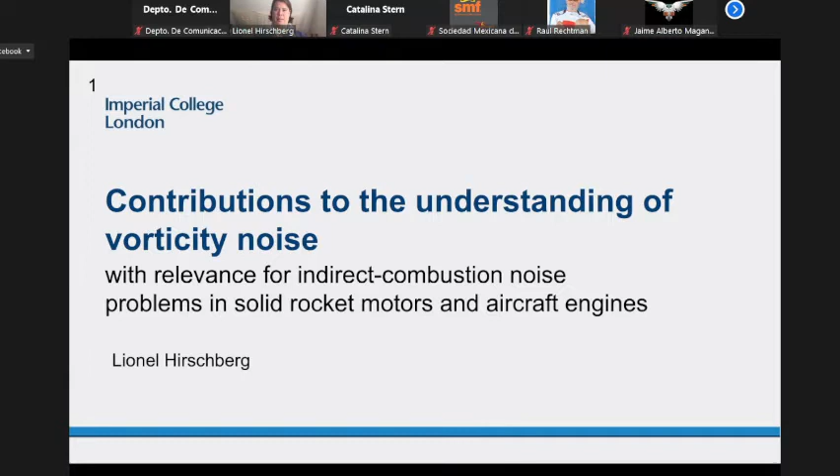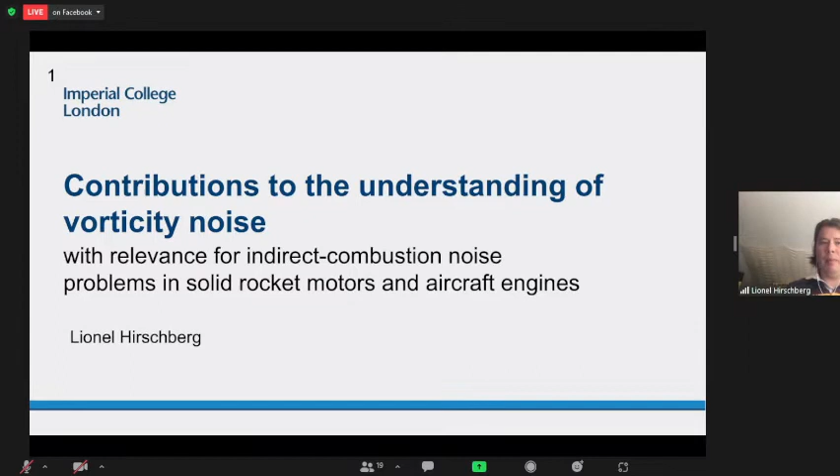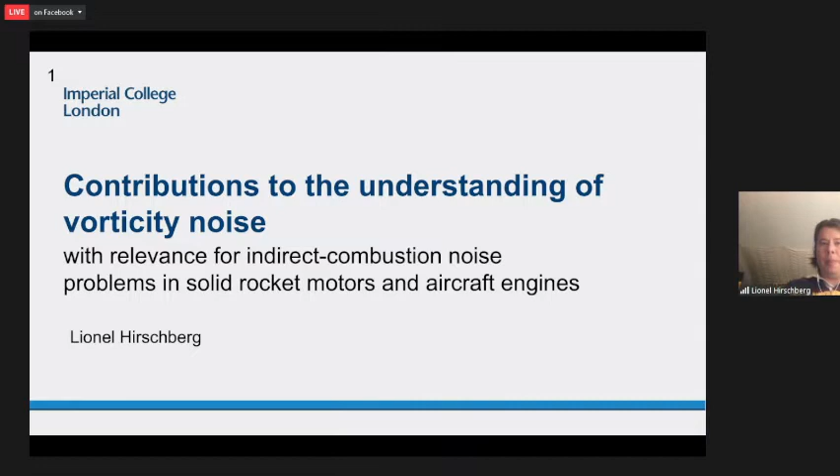Thank you very much, Enrique. I changed the title of my presentation a little bit, but I'm basically going to talk to you about my contributions and my co-authors' contributions to the understanding of what we call vorticity noise in jargon. This is relevant for indirect combustion noise problems in solid rocket motors and aircraft engines. Now, what do we mean by vorticity noise? I think it's most expedient to just start by way of example to explain what we mean by that.

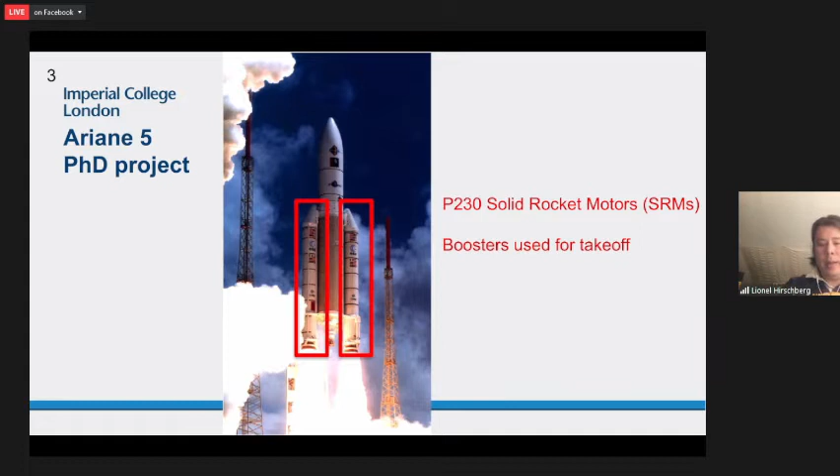Seem to have a problem. Okay. Sorry, thank you for bearing with me.

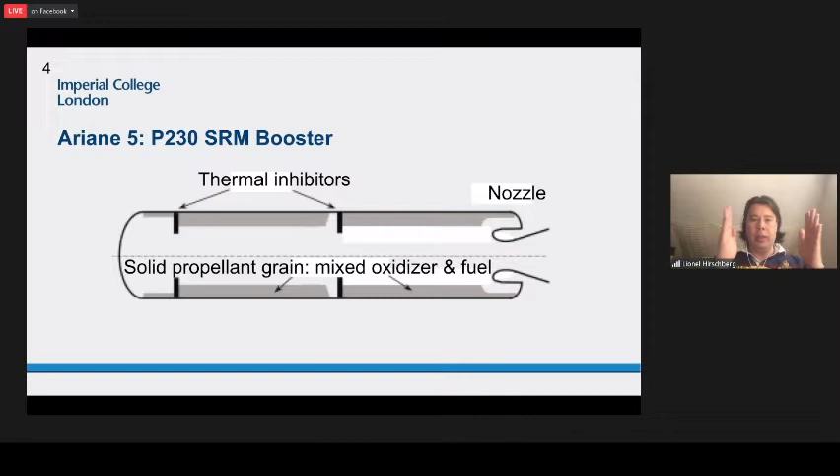So a solid rocket motor is actually a pretty simple device. I show a sketch on this slide. It's basically a cylindrical tube closed at the head end with a nozzle downstream. So that's the combustion chamber exit. And on the side walls, there are propellant grains, a mix of oxidizer and fuel, that are separated by inhibitors. And once you ignite this propellant, the combustion causes a mass flow that exits through the nozzle.

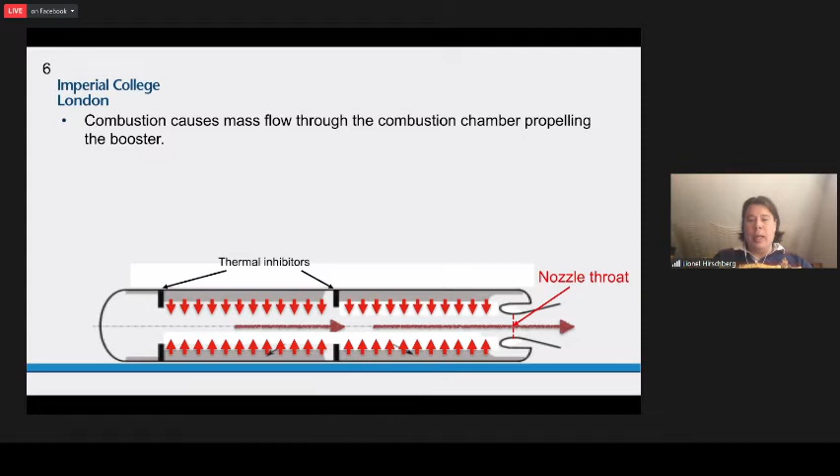And this nozzle is basically convergent-divergent. At the point where the cross-sectional surface area is the smallest, we call this area the nozzle throat. The conditions inside this combustion chamber are such that the static pressure is about 5 megapascals. That means that at the nozzle throat, the Mach number based on the actual velocity, u_x throat, divided by the local speed of sound equals 1. We say that the flow is transonic, and we call this a choked nozzle flow.

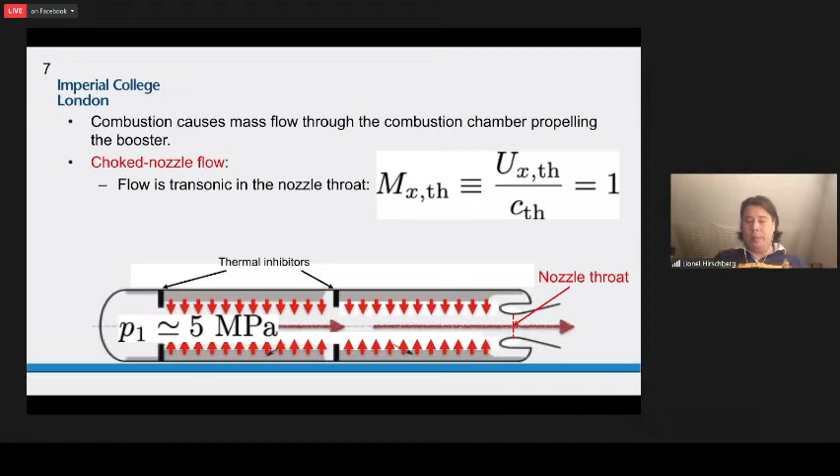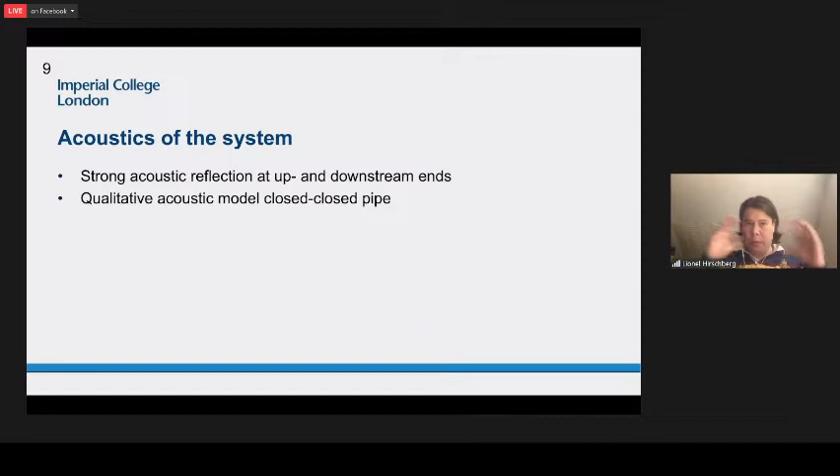There are some characteristics of the acoustics of this system that I want to explain to you. Basically, there are strong acoustic reflections at the up and downstream ends of this cylindrical tube. So qualitatively, we can model this as a closed-closed pipe system for the sake of acoustics. And the lowest longitudinal acoustic mode, which we call the first longitudinal acoustic mode, is half a wavelength.

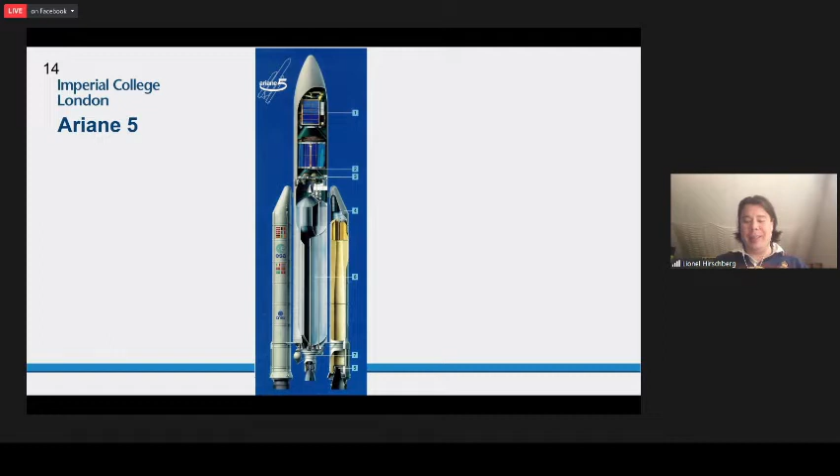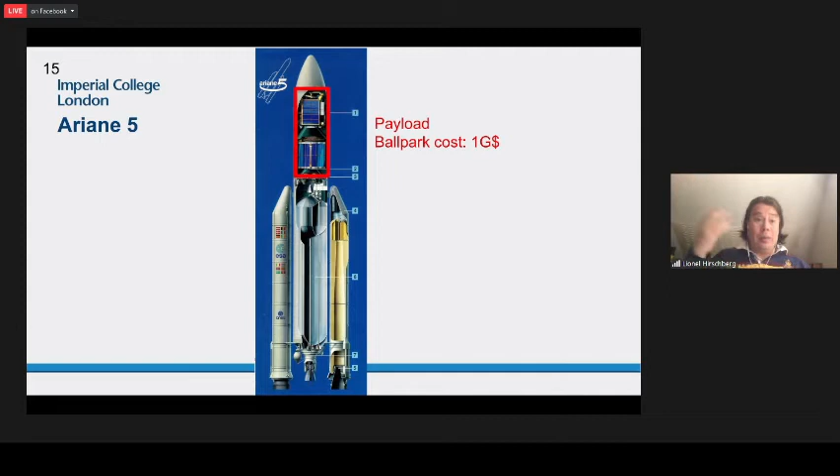Why is this a problem? Well, that's because the whole design purpose of Ariane 5 and launch vehicles like it is to bring payload, i.e. satellites, into geostationary orbit around the Earth. These are very, very expensive devices. They cost about $1 billion US to make. And they're fragile. So you want them to arrive into orbit around the Earth, and you want them to work. The problem is that these self-sustained pressure pulsations, in the worst case scenario, can cause vibrations that couple with the structure of the main stage and pose a threat to the payload.

So it becomes imperative to understand what fundamentally drives these self-sustained pressure pulsations. And the sound source especially is important, and that was the focus of my PhD thesis. So let's turn again to the occurrence of these pressure pulsations in these solid rocket motors.

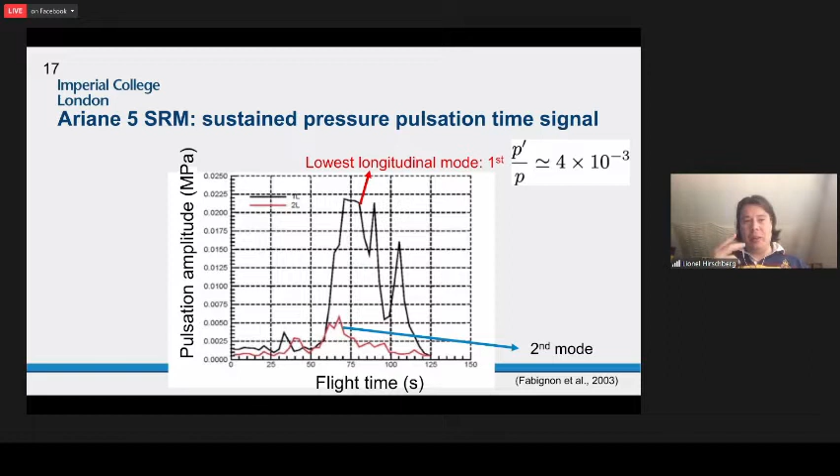So we have the pulsation amplitude in megapascals as a function of flight time in seconds, and we observe that they only start to occur halfway through flight. And you can legitimately ask yourself, why would this be? And as it happens, there are two components to this answer. The first is that this propellant grain that I talked about earlier is separated by thermal inhibitors.

And as the propellant grain burns, these thermal inhibitors protrude out of the burning surface, and you have vortex shedding on these thermal inhibitors, and ring vortices are created that convect downstream with the base flow, have an interaction with the combustion chamber exit. So that's what I'm showing here.

This is a numerical simulation performed by Jérôme Anthoine, who did a PhD thesis in the 1990s on this subject. And basically, my work builds on what he has done, or our work, me and my co-authors. So you have vortex shedding at these thermal inhibitors, and these ring vortices convect downstream and have an interaction with the combustion chamber, that is the choke nozzle. So the combustion chamber exit.

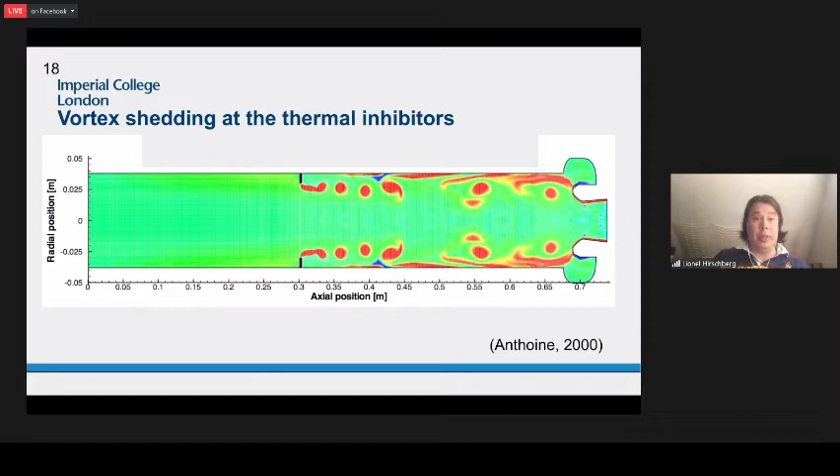Another thing that happens is that the type of nozzle that is used in these systems is what you call an integrated nozzle. That means that there is a volume around the inlet of this convergent divergent nozzle. And initially, that is the first 60 seconds approximately, this whole volume is filled with propellant. But as flight progresses, this propellant burns, and you now have an acoustically available cavity volume, a volume VC.

Well, Jérôme Anthoine experimentally established that the pressure pulsations in these systems are proportional to this cavity volume VC. And me and my co-authors, by doing systematic numerical investigations, were able to confirm this and derive scaling laws. These numerical investigations, I've done them using a state-of-the-art aeroacoustics code developed by Steven J. Hulshoff of the Delft University of Technology.

And on this slide, I show an example of such a simulation where the nozzle is a simple nozzle that is without these nozzle cavities. And you will see it already, there's an effect. So for this simulation, we established a steady base flow that goes from left to right on this slide, and is such that the combustion chamber exit, the nozzle, is choked. That is, at the nozzle throat, you have a local Mach number of 1.

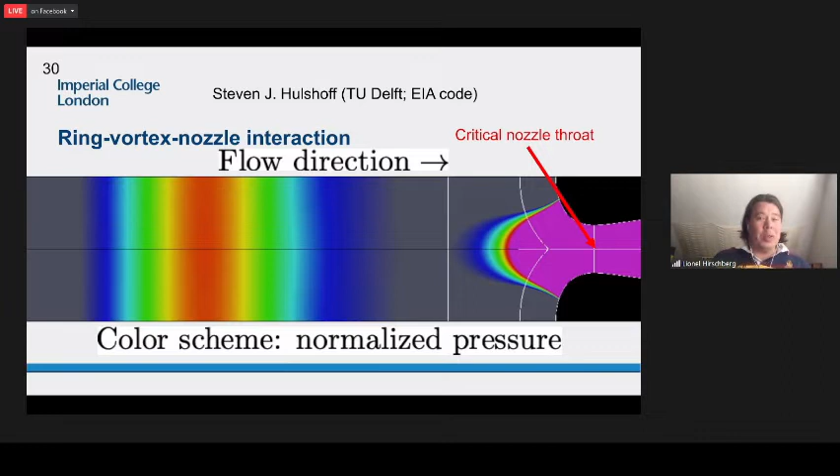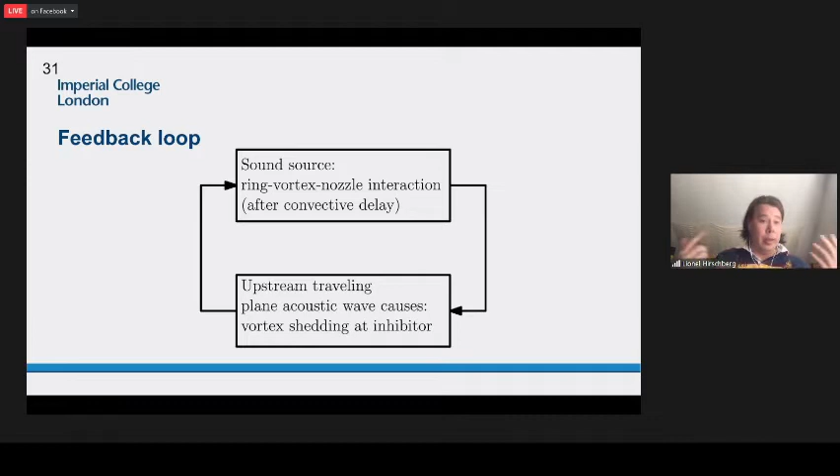Me and my co-authors referred to this as ring vortex nozzle interaction. So you have a situation where vortices are shed upstream from a choke nozzle. There's a convective delay. You have this ring vortex nozzle interaction, which produces an acoustic wave that travels back upstream, which causes vortex shedding in these systems. So you have a feedback loop, and as such, this is a self-sustained pressure pulsation.

So our contribution was to derive scaling laws for sound production due to ring vortex nozzle interaction, and we developed analytical models. So in this system, the sound source is the unsteady hydrodynamic reaction force from the nozzle inlet walls on the fluid. And the force is a time-dependent force which is being induced by the ring vortex as it approaches the nozzle and is being ingested by it.

So the sound source here, we've called it ring vortex nozzle interaction. In the literature, in the jargon, one refers to this as indirect combustion noise because the propellant is burning and this causes the mass flow and the shedding of the vortices, etc. Another term for this specific type of indirect combustion noise is called vorticity noise. That's what people refer to it in the literature.

So the important thing here is that in the system, the type of vortices that are created are ring vortices. And I have a very nice picture on this slide that shows a ring vortex. The most important takeaway from this picture is that you can clearly see that the vorticity component is normal to the main flow for ring vortices.

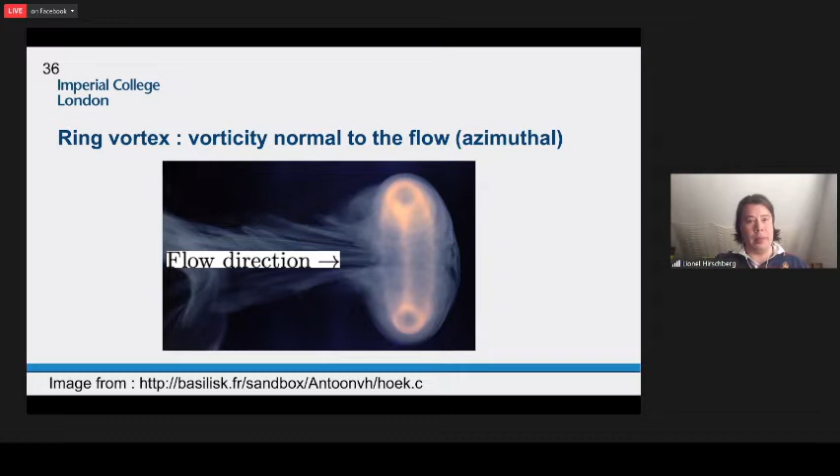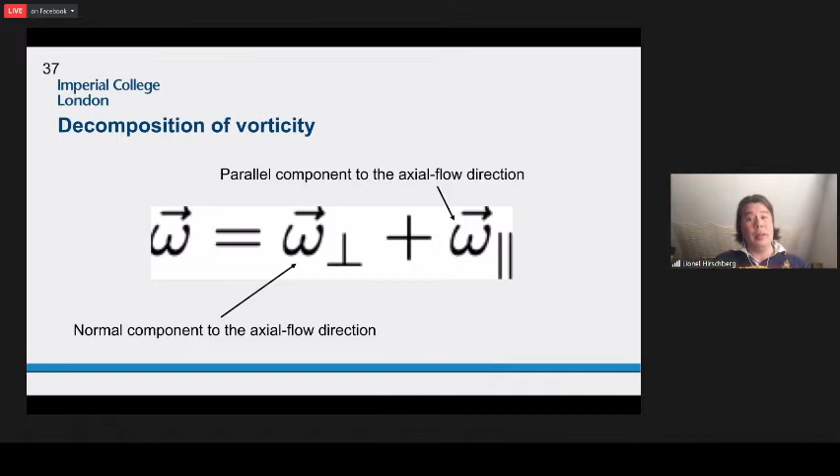But vorticity is a vector. And as such, you can always decompose a vector. And I propose that we decompose it in a component that is normal to the axial or main flow direction, and one that is parallel to the main flow direction. So contributions to vorticity noise due to the normal component, that would be ring vortex nozzle interaction, for example, and that was the subject of my PhD.

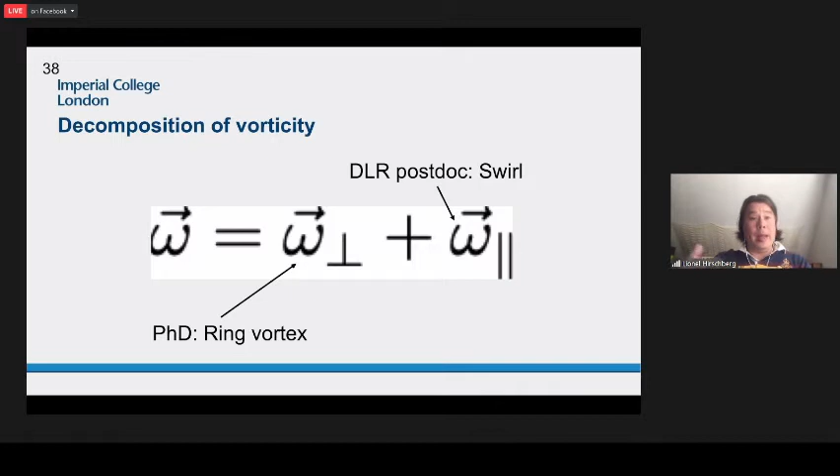Everything that is parallel to the main flow or parallel to the axial flow direction, that's what we would call swirl nozzle interaction or axial vortex nozzle interaction. And that was the subject of my investigations during my postdoc at the DLR in Berlin, where I worked in Friedrich Bake's group. And they are interested in noise, indirect combustion noise produced in civil aviation aircraft engines.

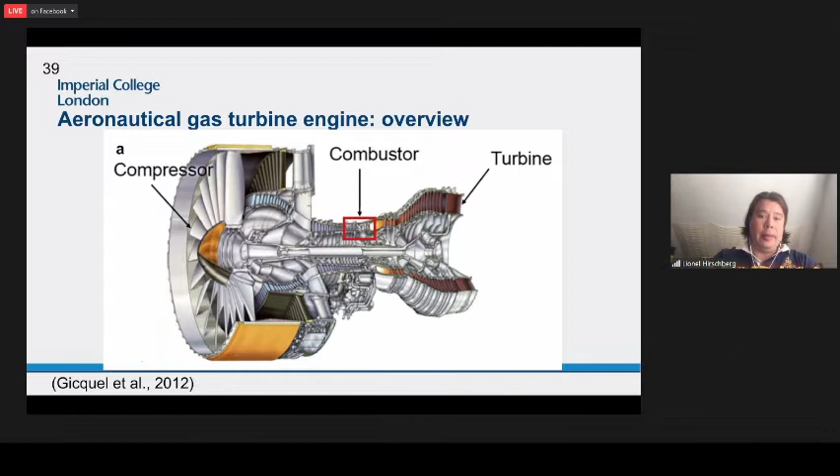And on this slide, I show a sketch of such an engine. So you have a compressor, a combustor, and a turbine. And it's in the combustor that things happen that are of interest for the DLR, at least that team. So that's highlighted by the red rectangle on this slide.

And what's important to note is that upstream from basically the combustor inlet, there's a device called a swirler. And this swirler creates an axially oriented vortex, or what they call a swirl, to stabilize combustion. So the reacting zone basically has an axially oriented vortex, or a vortex that is in the direction of the main flow. So you have a vorticity component that is parallel to the main flow direction.

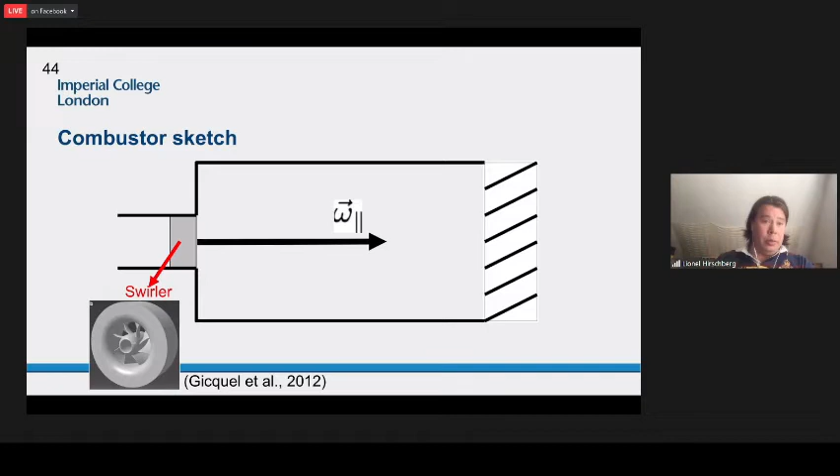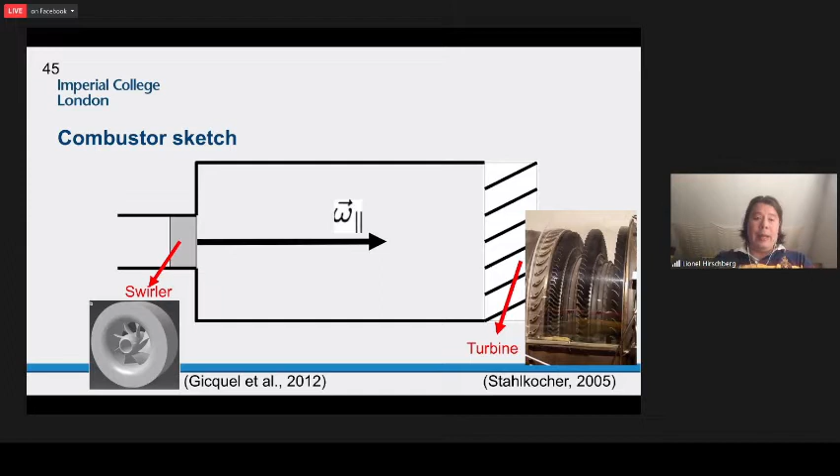But when you take a step back and you look at such a combustor, and I show a very simple sketch of the combustor here, you have an upstream swirler, which causes a swirl, that is an axial vortex, to be created. So you have a vorticity component in the direction of the main flow, and this will obviously have an interaction with the combustion chamber exit, and that's a turbine stage. Well, a turbine stage is basically a succession of rows of choked nozzles.

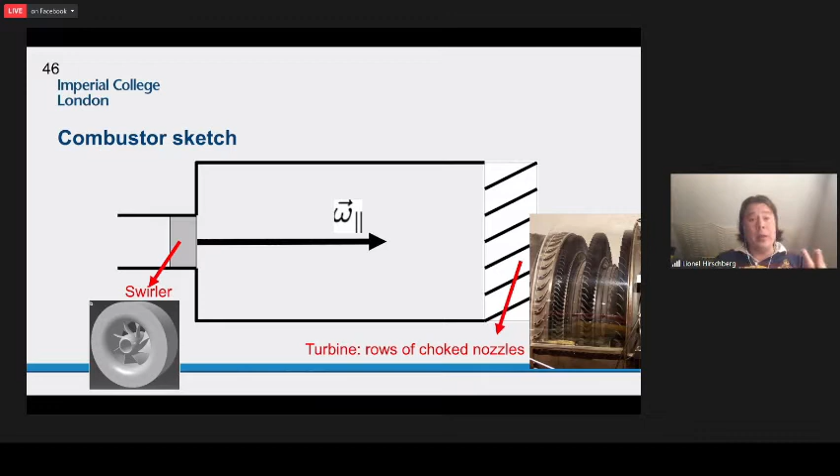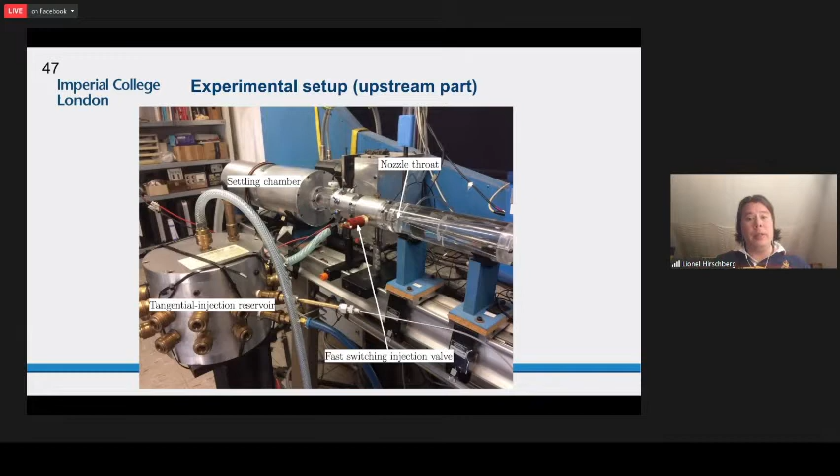It is extremely expensive and complicated to do either numerical simulations or experiments with rotating machines. So at the DLR, they chose to simplify. And they have a setup there that I helped to improve, where you basically investigate the interaction of swirl or axial vorticity with a single choked nozzle. And on this slide, I show the upstream part of this experimental setup. But it's easier to understand what we did if you look at the sketch that I show on this slide.

So you have a mass flow rate that we impose upstream. So that's on the left-hand side highlighted by the red rectangle, M1 dot, which we impose, and it is 43 kilograms per hour, and it imposes basically a steady base flow that goes from left to right and goes through a convergent divergent nozzle, and is such that the nozzle is choked. That is, at the nozzle throat, we have a Mach number equal to 1, and we chose 43 kilograms per hour because we have a choked nozzle flow, but the downstream shock is weak. So you have a normal shock that exists downstream from this nozzle throat. So you have this steady base flow.

A little note about the notation on this slide. Basically, the subscript 1 indicates parameters upstream from the nozzle, and the subscript 2 indicates parameters or variables that are downstream from the choked nozzle.

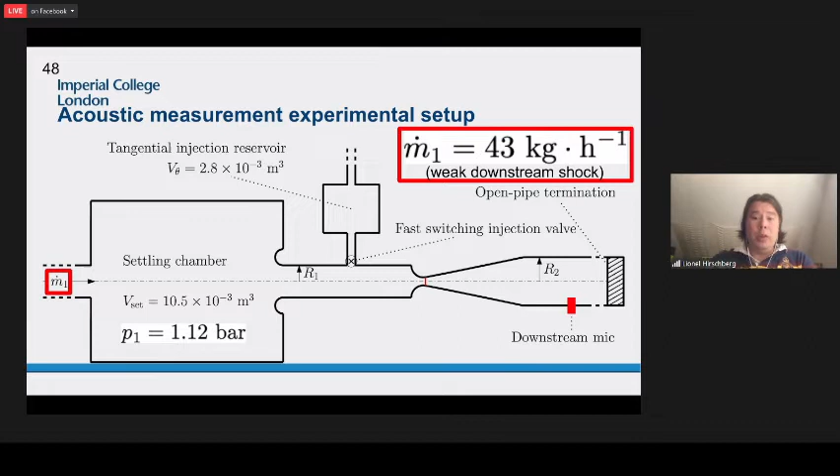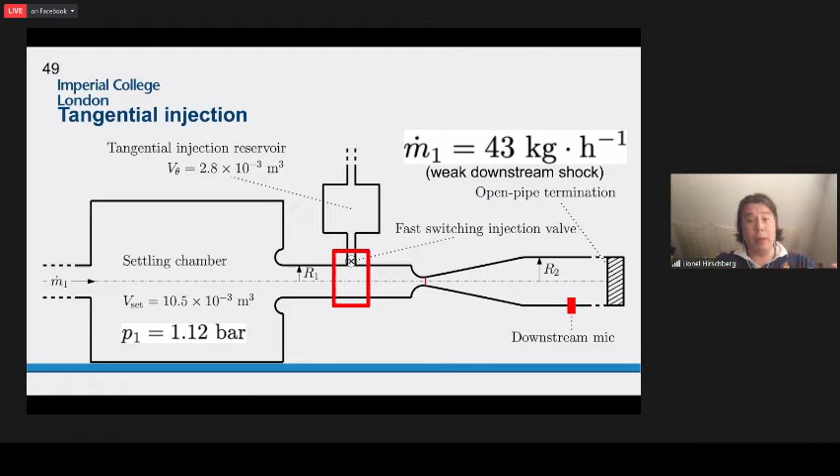So basically, we have a situation where we've imposed a steady base flow. You have a choked nozzle, and we are now going to do tangential injections of air from a pressurized reservoir in the region that I highlight with the red rectangle on this slide. We do this using an unsteady tangential injection module, which I show on this slide.

The most important part of this injection module is a fast switching valve. It's basically a valve that opens and closes very quickly, in 2 milliseconds. You can fix the time that the valve is open, and we've done this. So for example, in the results that I'm about to show you, we fixed it at 24 milliseconds.

And what we did in the experiment is basically open this for 24 milliseconds, then wait 3 seconds, and then redo an injection event, and basically repeat this 100 times, and then average the signal to get rid of some noise. So

The distance between the microphone that we use to record this acoustic response and basically the end of the experimental setup is 24 meters, or it was. And we've chosen this very long pipe section because it allows us to measure the acoustic signal without upstream traveling acoustic reflections. So we have basically an anechoic signal for about 140 milliseconds.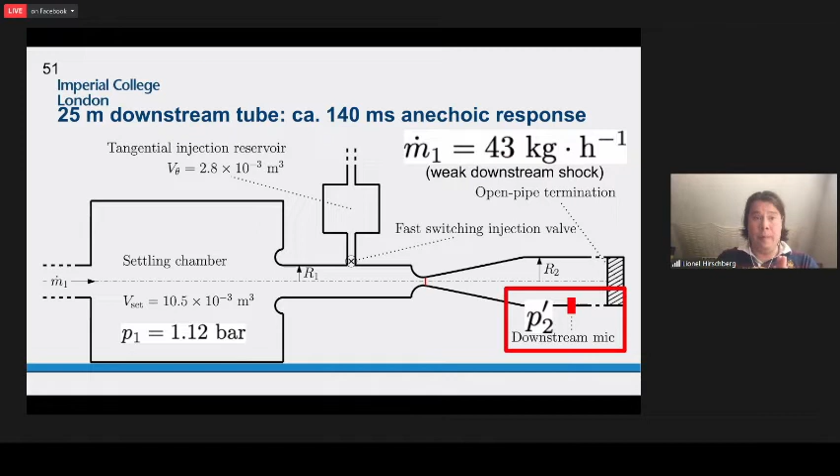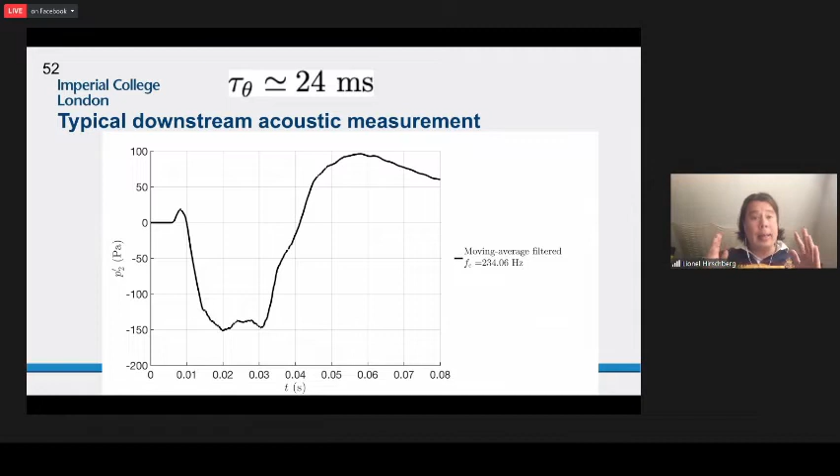What I show on this slide is an example of an acoustic response for an opening time of 24 milliseconds. So on the vertical axis, you have P2 prime in pascals, the downstream acoustic signal, as a function of measurement time in seconds on the horizontal axis. And basically, as it turns out, after our analysis, we find that this response due to the interaction of swirl with this choke nozzle occurs in 3 steps.

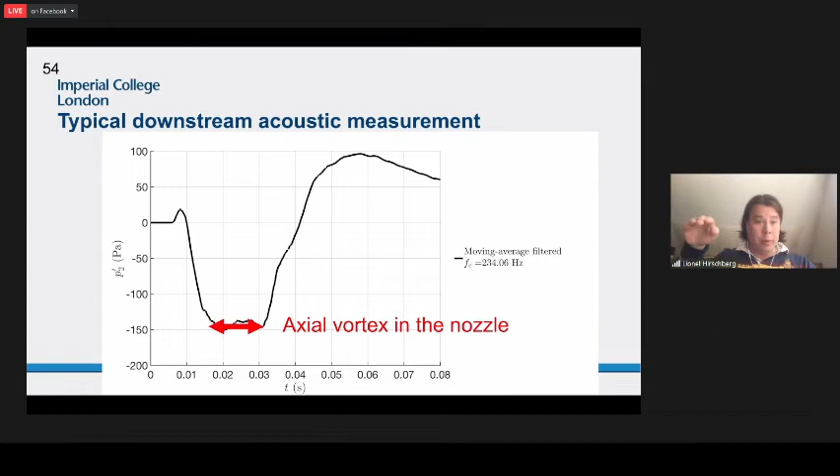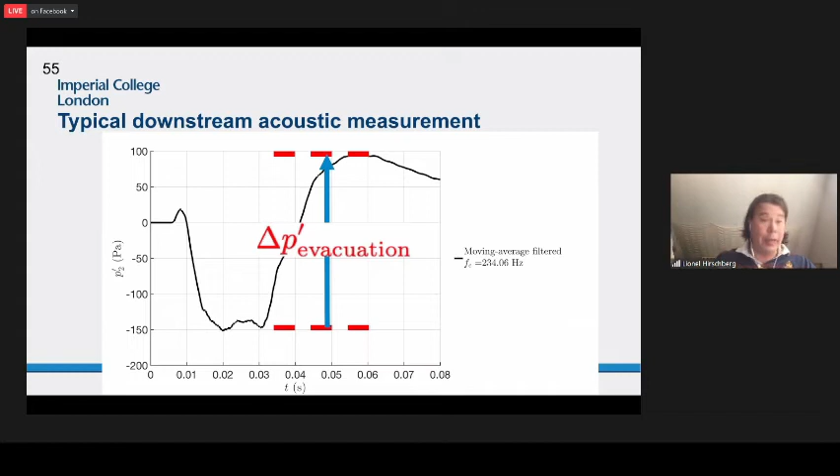The first step is an ingestion phase. This causes an abrupt decrease of pressure in the downstream pipe section. Then we have the presence of swirl in the nozzle, which causes a plateau. And then you have a rapid increase of pressure in the downstream pipe section, and that's due to the evacuation of said swirl. So you might ask yourself, why would that be? And that's a very legitimate question. I'm going to attempt to qualitatively answer this question for the ingestion phase.

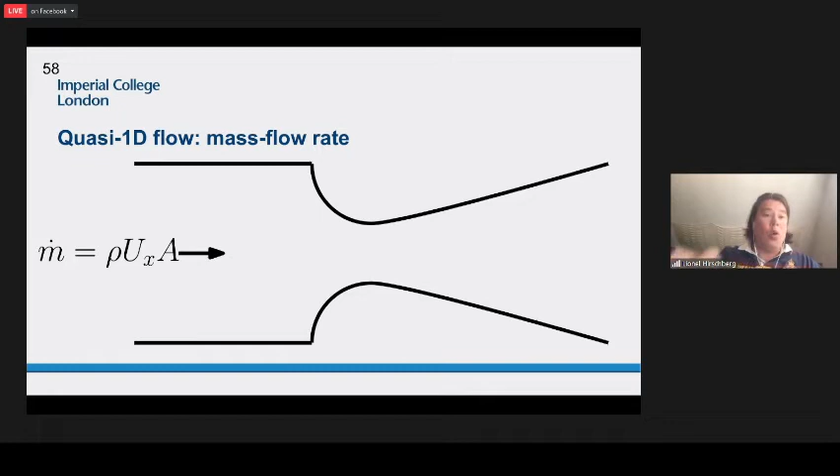So consider the convergent-divergent nozzle. And we impose upstream a mass flow rate, m dot, which basically causes a quasi-1D flow. And it is such that at the nozzle throat, we have a Mach number based on the axial flow velocity, ux at the throat, and the local speed of sound; the Mach number based on these equals 1.

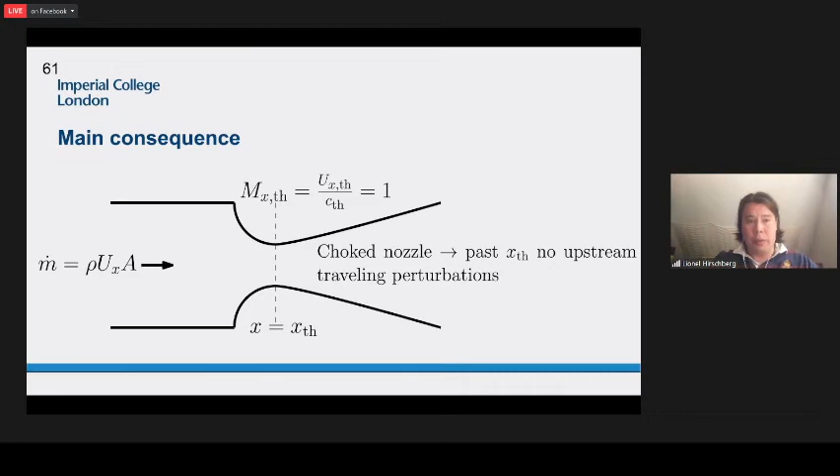The most important consequence of this choking condition is that basically any perturbations that occur downstream from the nozzle throat cannot travel back upstream. Imagine now if we introduce a swirl structure upstream from the choke nozzle, as shown on this slide. Initially, there is no swirl or axially oriented vortex at the nozzle throat. So there is no azimuthal velocity component.

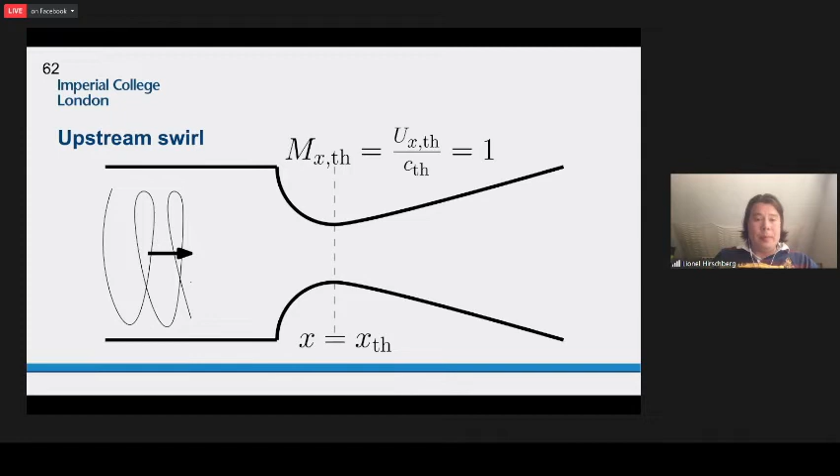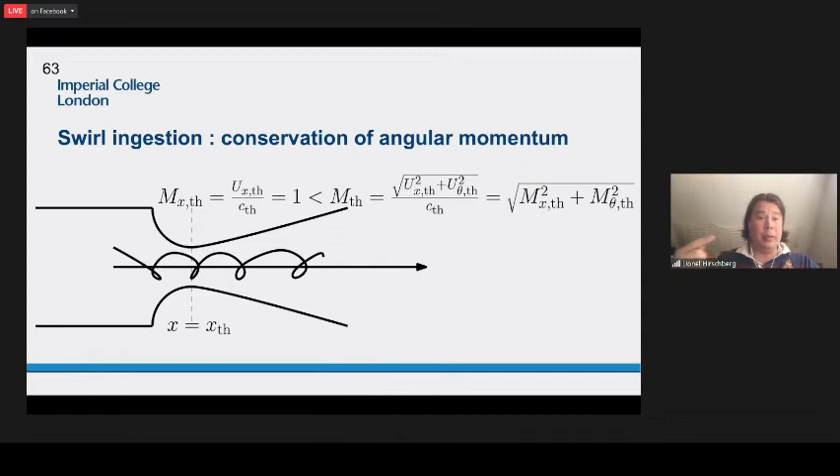But then it will get to the nozzle throat and will ingest this swirl, and this will cause a very significant stretching, and it will cause an azimuthal velocity component to exist at the nozzle throat. So the choking condition will remain the same, but the Mach number is now basically the sum of the axial Mach number at the throat squared plus the azimuthal Mach number at the throat squared, and you take the square root of that.

So basically you have a situation where swirl goes into the nozzle, which causes significant axial stretching. This causes an increase in rotational energy, and because of energy conservation, this causes a reduction of axial mass flow rate.

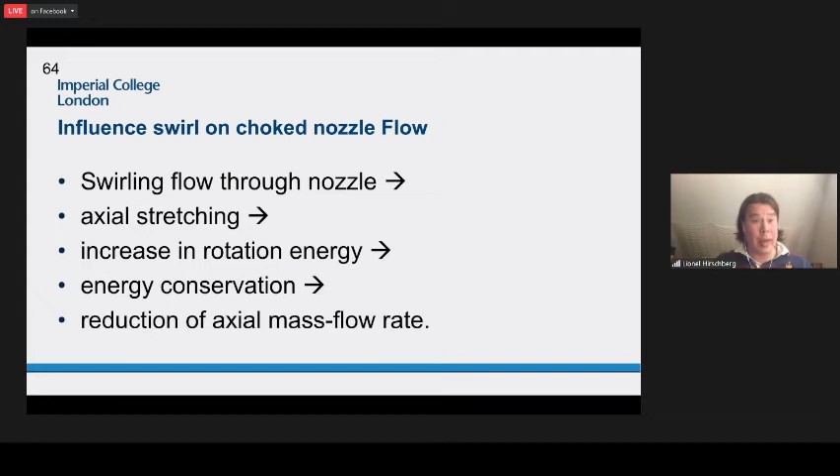So these types of problems have been studied since the 1970s, in famous papers by Carpenter, but for steady flow, right? Whereas the experiment that we did is an unsteady tangential injection event. Now, consider the formula that I show on this slide.

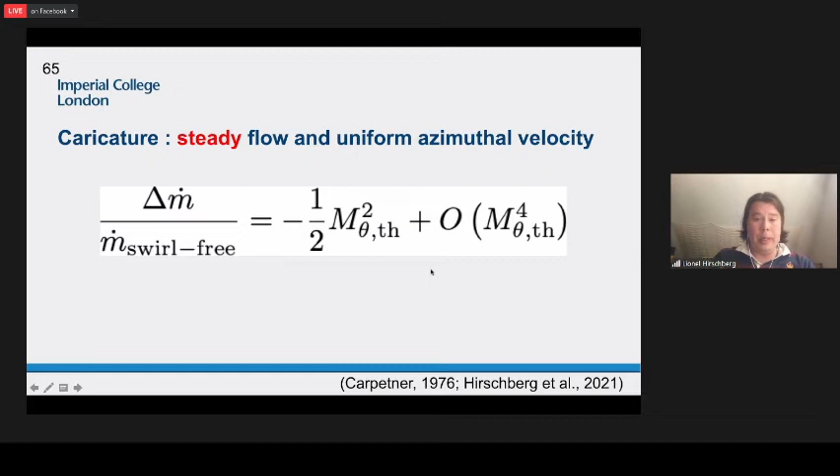It says that the change in axial mass flow rate due to the presence of swirl at the throat with respect to the swirl-free case is proportional to the azimuthal Mach number at the nozzle throat squared. So this means that when you have swirl at the throat, the axial mass flow rate reduces.

So what we can do then is use this information to propose a simple acoustic model for the downstream acoustic response, where we assume that we basically have a semi-infinite system. There's no acoustic reflections that travel back upstream. And we find that the acoustic response downstream, delta P2 prime, is approximately equal to the speed of sound in the downstream pipe section divided by the cross-sectional surface area of said pipe times the axial mass flow rate change,

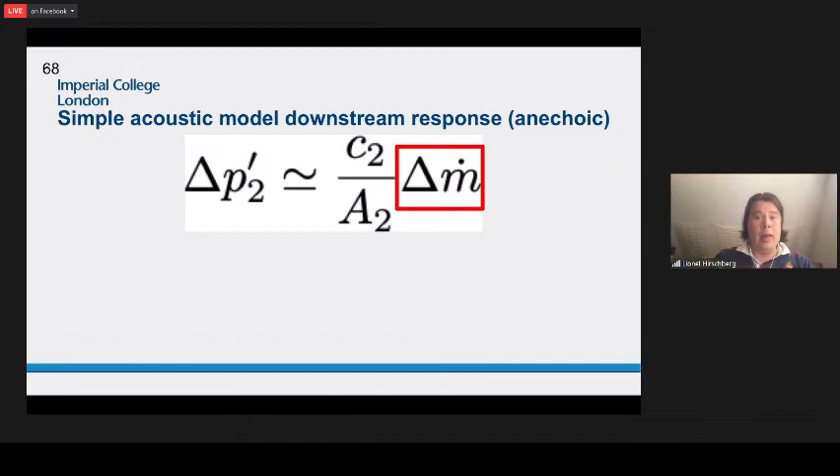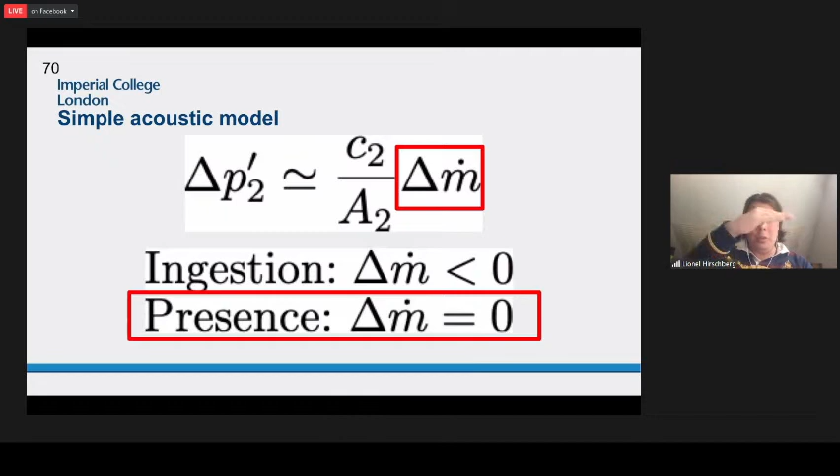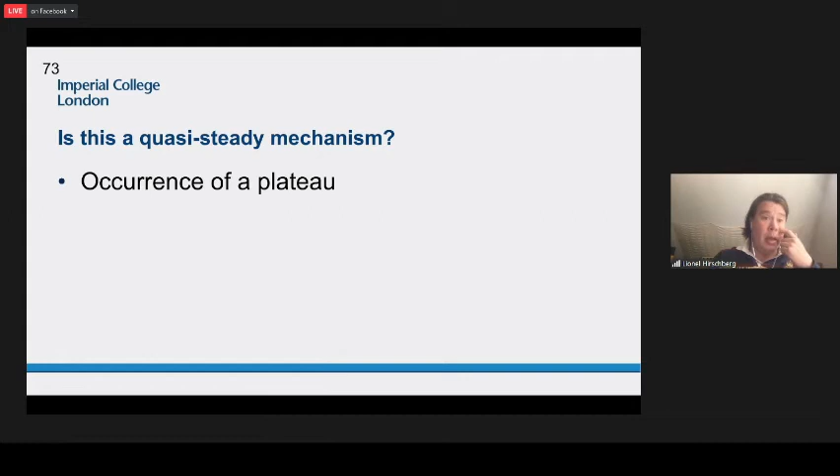delta m dot. And delta m dot is negative when the swirl structure is ingested. It is 0 when the swirl is present, so you have a plateau. And then it is positive when the swirl is being evacuated by the choke nozzle. So we asked ourselves, is this a quasi-steady mechanism? And the reason why we asked ourselves this question is that there's a plateau.

Moreover, we did experiments where we lowered and augmented the opening time of this fast switching valve, and we found that the acoustic response was not affected by the injection time. So we thought it would be worth trying coming up with a quasi-steady model.

And to do that, we replaced in the experiment the unsteady injection valve with a mass flow controller, such that we could fix the tangential mass flow rate m theta dot steady and the axial mass flow rate m1 dot. And we did it such that the total would remain those 43 kilogram per hour. So we could vary the ratio between the steady tangential mass flow rate m theta dot steady divided by m dot, or divided by 43 kilogram per hour.

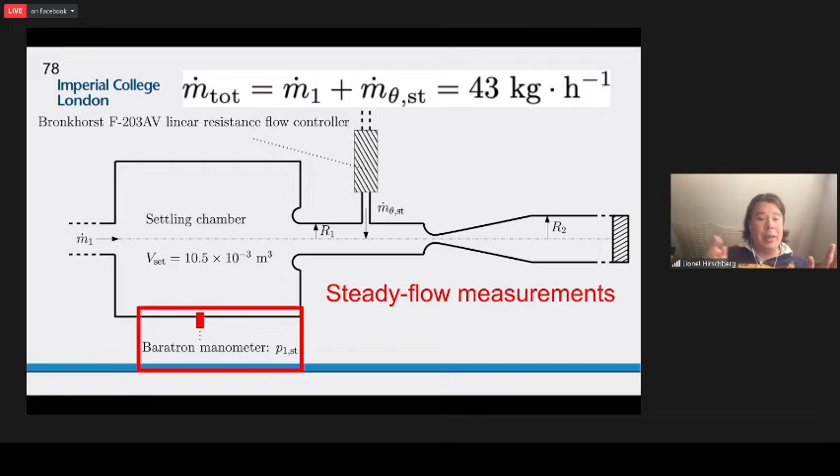Whenever we changed this ratio, we would wait 5 minutes for steady flow to establish, and then measure the upstream reservoir pressure P1 steady using a Baratron manometer. And the results are shown on this slide. So you have on the vertical axis the steady upstream reservoir pressure in pascals as a function of the ratio of the steady tangential mass flow rate divided by 43 kilogram per hour, and this is squared.

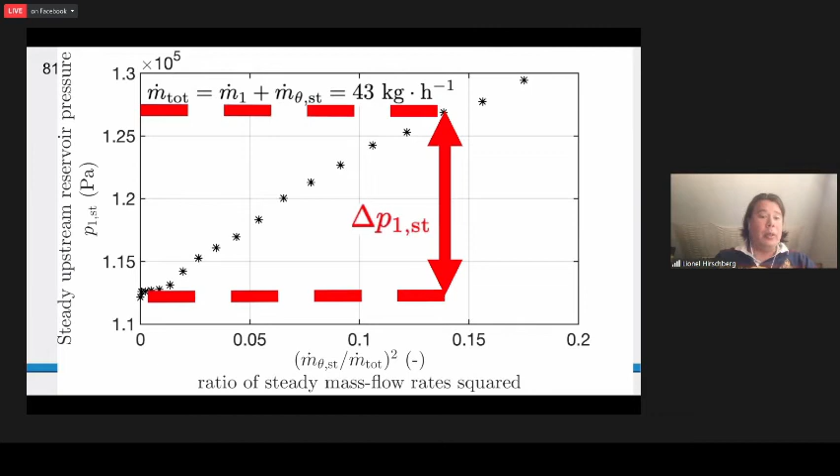So what can you do with this information? Well, you can look, for example, at the horizontal axis and look at 0.14 and see that the presence of a vortex with this intensity, so to speak, causes the upstream reservoir pressure to increase by an amount of delta P1 steady.

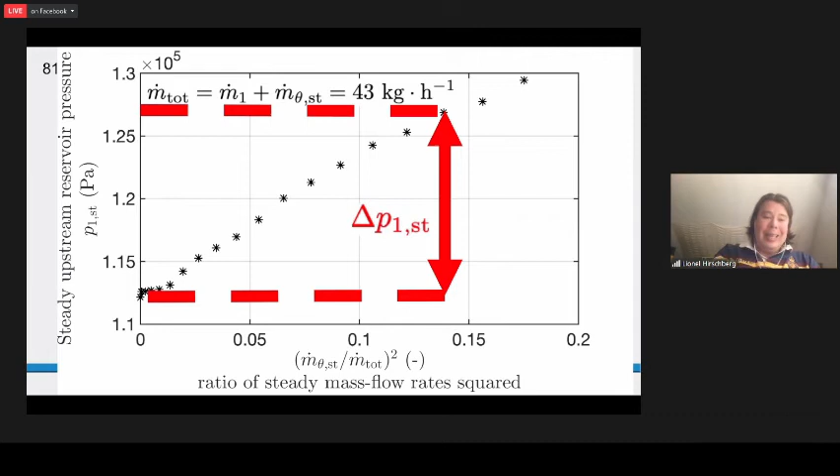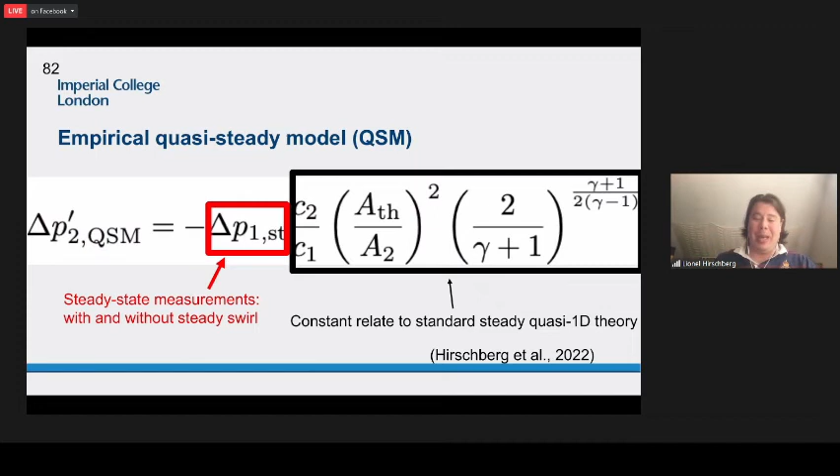Now, these data, we have them for a number of points, and we substitute them in a quasi-steady model, which we derive in an upcoming Internoise paper, and which is also treated in a recently published Journal of Sound and Vibration paper that I'll happily share with you all. So moving on, let's return to the acoustic measurement.

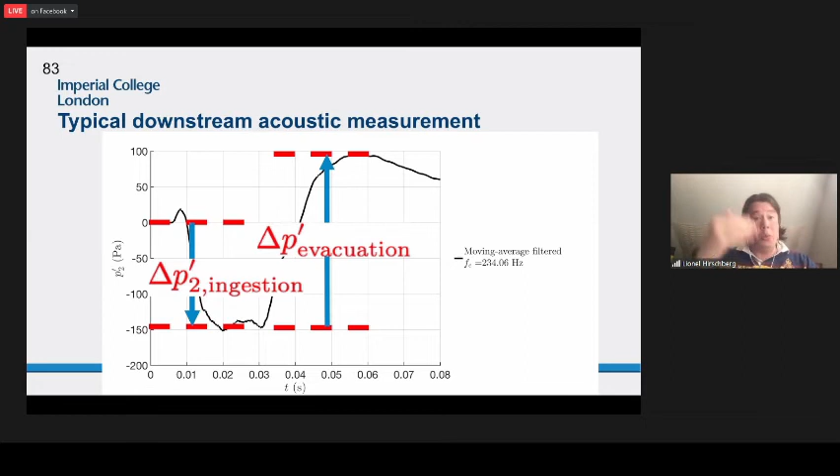So if you recall, you have basically a lowering of the pressure due to swirl ingestion and an increase in downstream pressure due to the evacuation of said swirl. And we notice that the amplitudes are smaller for swirl ingestion and larger for swirl evacuation.

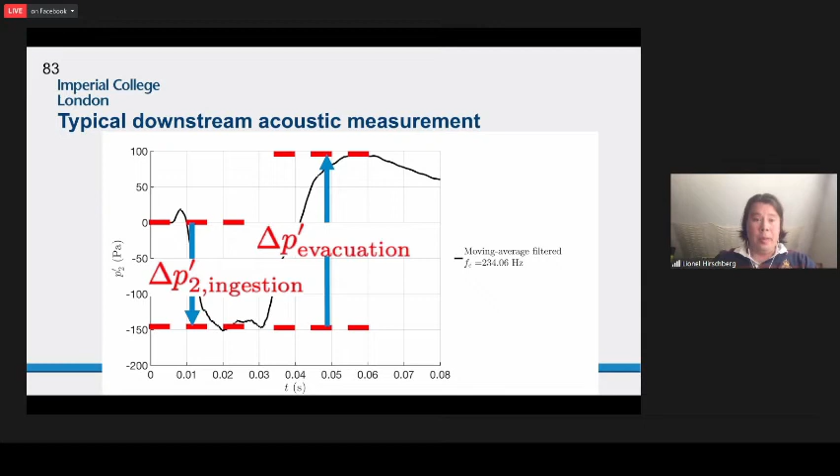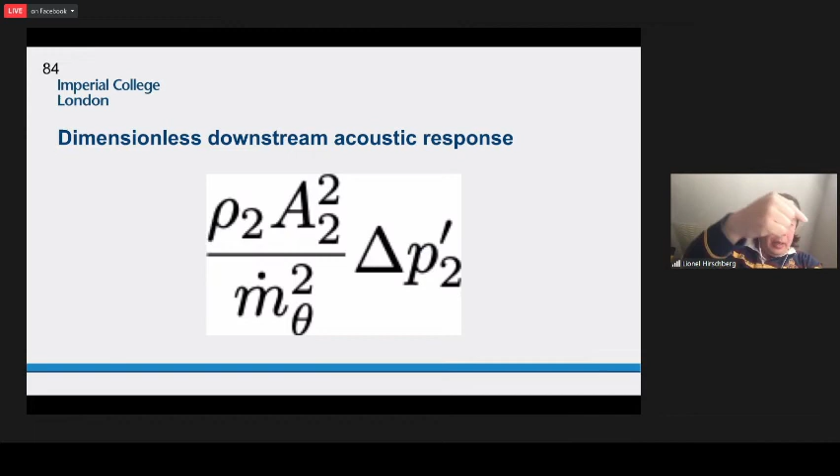So in what follows, delta P2 prime is scaled, and I've done this by multiplying by the density in the downstream pipe section times the cross-sectional surface area squared of the downstream pipe section divided by the unsteady tangential mass flow rate injected upstream, m theta dot squared. And the result is shown on this slide.

So you have this downstream dimensionless acoustic response as a function of the ratio of the unsteady tangential mass flow rate, m theta dot, divided by those 43 kilogram per hour, and that's squared. The most important first thing that you observe is that you basically have two horizontal lines. The crosses here are the amplitudes due to swirl ingestion, and the circles are due to swirl evacuation.

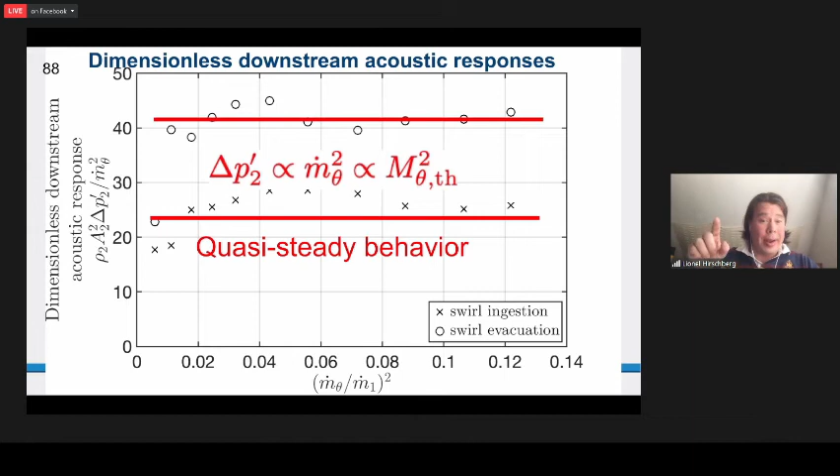And you see basically there's two horizontal lines, and we see about a 40% systematic deviation in amplitude between swirl evacuation and swirl ingestion. But more importantly, because these are horizontal lines, this confirms that the downstream acoustic response, delta P2 prime, is proportional to the upstream injected tangential mass flow rate squared. And this means that it's also proportional to the azimuthal Mach number at the nozzle throat squared. So this confirms quasi-steady behavior.

So I conclude, we've measured the acoustic response downstream from a choked nozzle due to swirl ingestion and evacuation. We find that there's a systematic difference in amplitude between those of about 40%. And we find that the acoustic response scales quadratically with the upstream injected unsteady mass flow rate.

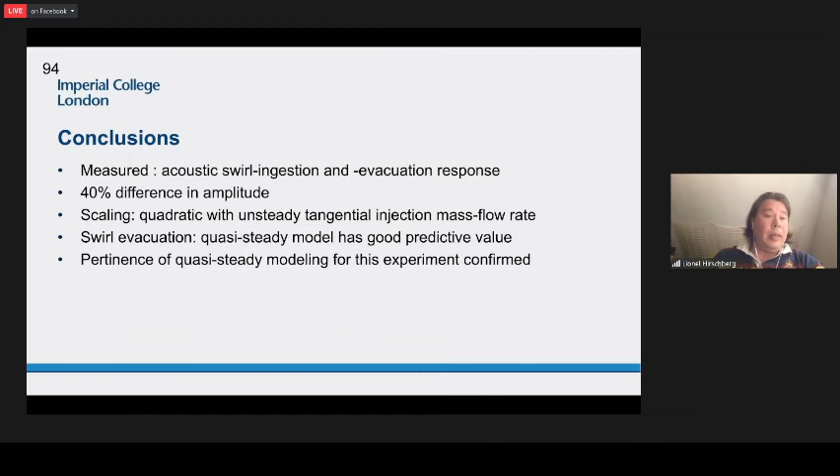Swirl evacuation: those data compare very well with a quasi-steady model that we have proposed. And as such, to me, this confirms the pertinence of quasi-steady modeling for this experiment. Now, before I leave you, I just want to leave you with some general remarks on vorticity noise, that is, indirect combustion noise due to vortices and vorticity as you can find them in the literature.

If you look at the literature, you will find that most models are based on linear theory. But in our experiment, those swirl effects, they're quadratic. Moreover, in the literature, you will find that vorticity is being treated as a scalar, but vorticity is obviously a vector.

And you also find basically bare assertions that somehow the sound source in these systems, this indirect noise, is due to the acceleration of vorticity, or what they call vorticity waves. This is obviously not the case in the experiment that we've performed at the DLR. As such, it is my position that the vorticity noise paradigm, as it relates to indirect combustion noise, should be reconsidered.